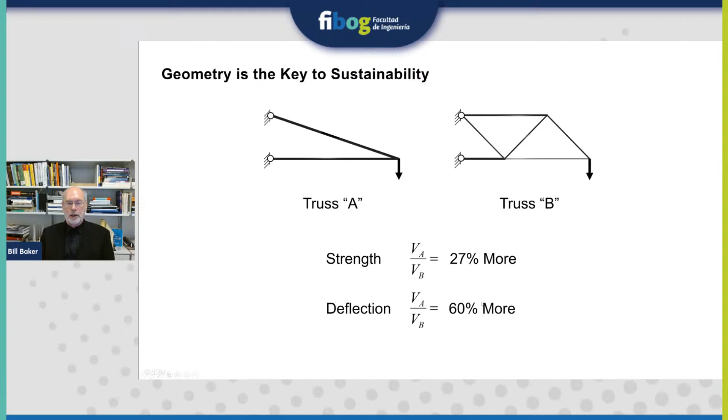Here I show two different trusses that do exactly the same job. There are 3-to-1 cantilevers, truss A and truss B. But if you're controlled by strength, the one on the left needs 27% more material than the one on the right. And if you're controlled by deflection, the one on the left needs 60% more material than the one on the right. The difference between the two trusses is fundamentally geometry.

The efficiency of structures is very important, particularly in these days of concern about the climate, because on day one, most of the carbon of a new building is in the structure.

Geometry is also the intersection of architecture and structure. It is the common language to both disciplines. And we'd like to introduce a little terminology that's helpful in this discussion: topology, shape, and size.

We'll start with the geometry terminology for design. We have what we call the design domain, where the structure might exist. There are three geometrical aspects of this: topology, which is what is connected to what; shape, which is how you take that topology and move the nodes around, if you will, to create an efficient shape; and then finally, how do you size the members?

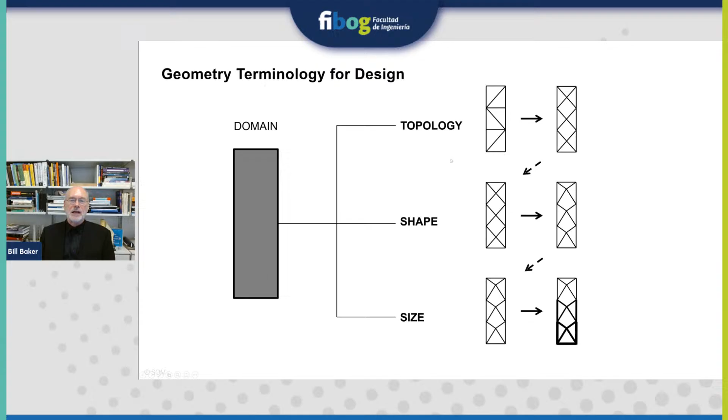Now, topology and shape are very highly related to architecture and the form of the building, but these are extremely important in the design of efficient structures. So it's important that the structural engineer is involved in determining the topology and the shape of the structure.

So how can one create efficient structural systems? I think you have to look to theory for design ideas. So today I'm going to present a few of my favorite theories, if you like, that are very helpful.

I'm going to start with something called the Maxwell load path theorem, created by Maxwell in 1870. James Clerk Maxwell, I'm going to refer to many times today. He is, of course, very famous for his work in electromagnetic theory, but he also did some very important work in our world of structural engineering.

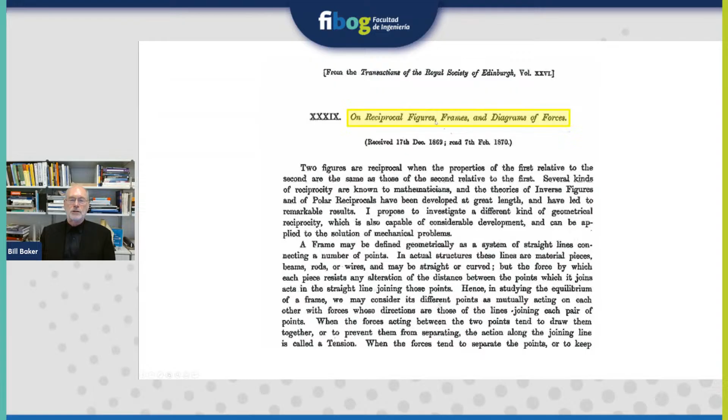He wrote this paper in 1870, called 'On Reciprocal Figures, Frames, and Diagrams of Forces,' where he describes some very important ideas, including this particular theory.

So I'm going to start out with a proof of the Maxwell load path theorem for an externally loaded truss. Here I have a truss. It's in equilibrium.

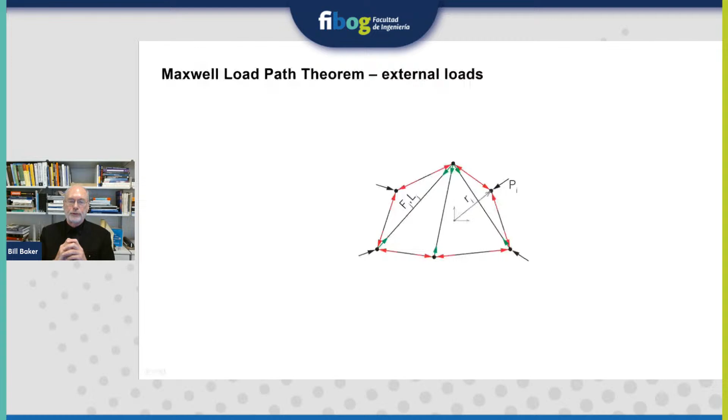I have a series of external loads, and a series of internal forces. The red arrows represent compression forces, the green arrows tensile forces. I'm going to keep the forces but throw away the members. It's important to recognize that every node is in equilibrium—all the forces add to zero at each node.

Now I'm going to take these forces and dilate the space. I'll pick an arbitrary origin, say right here—it could be anywhere. Then I'm going to dilate the space, making all the vectors twice as far from this origin.

As I do that, I do a series of work. First, these dimensions have just gotten twice as long—all the lengths are twice as long. All the external forces are now twice as far from the origin as they used to be.

So we've done a series of works. The external forces have done external work. The compressive members have grown by twice the length, so force times length is the work done. The tensile members are also twice as long, but they've done negative work because their arrows are opposite the direction of the elongation, creating negative work.

But because every node was in equilibrium, all of these forces have to add to zero. In essence, we've done no net work because all the nodes are in equilibrium.

So we can take this and rearrange it. This is the Maxwell load path theorem, where the force in all the tension members times their length, minus the force in all the compression members times their length, is equal to the dot product of the external forces with a position vector from any arbitrary origin.

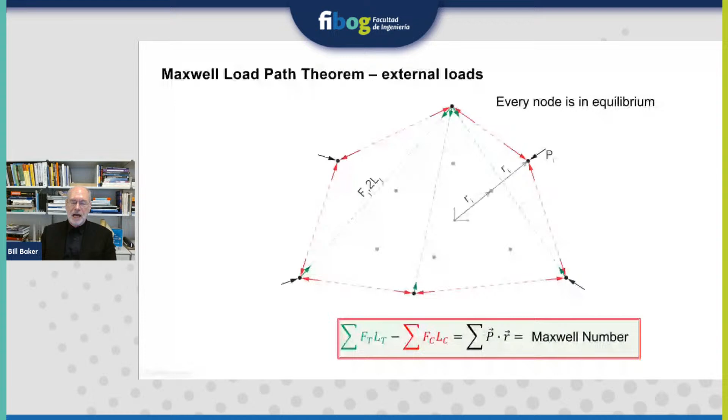For many structures you'll deal with in your career, this is a constant. So in many cases, the tension load path minus the compression load path is a constant. We call this dot product on the right the Maxwell number.

Let me give you an example related to that picture I showed you earlier. We're going to do a Maxwell load path theorem cantilever example. Here I have a cantilever, a load out here, and some supports back here. It's a 3-to-1 cantilever.

The moments are taken out by this couple, this 3P and this 3P, and the vertical loads are handled here. I'm going to apply the Maxwell load path theorem to this. I'll put the origin right here because I can put it anywhere—this happens to be a convenient place.

Now I'm going to do a dot product from this origin to all the perimeter loads. The dot product to this load is 0 because these are orthogonal to each other. Here at the origin, the length is 0, so this dot product is 0. I'll do a dot product to this horizontal reaction—because they're orthogonal, this dot product is also 0.

Finally, I do a dot product to this load at the top, and I get a value of PB. So the sum of all my dot products for all my external forces equals PB. Take a moment to reflect: I haven't even proposed a structure yet, but I already know the difference between my tension load path and compression load path, without even knowing what the structure is.

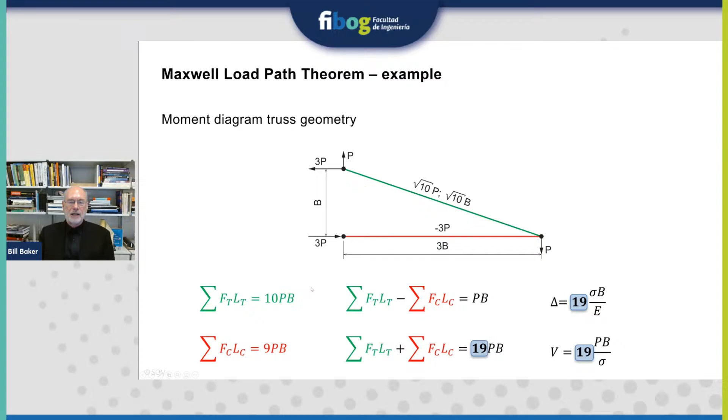So let's try a Pratt truss. If you go through the math, you'll see my compression load path has gone from 9 down to 8. I have 1 PB plus 2 PB plus 3, that gives me 6, plus these verticals, 7, 8. And my tension load path turns out to be 9. My difference has not changed. A completely different structure, but my tension load path minus compression load path has not changed.

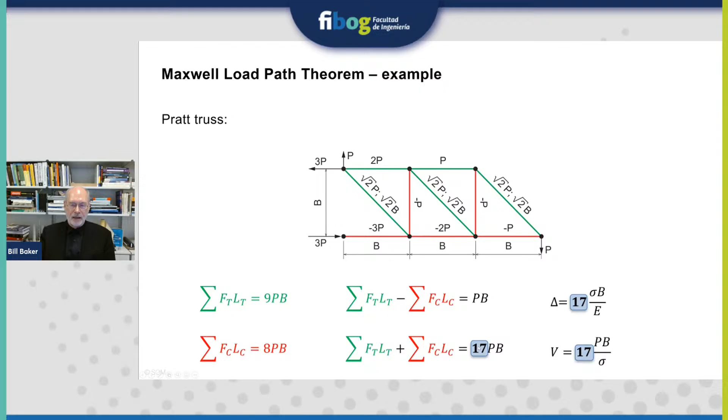My total load path has gone down. I actually have smaller deflection and less material. Let's try another solution - the Warren truss.

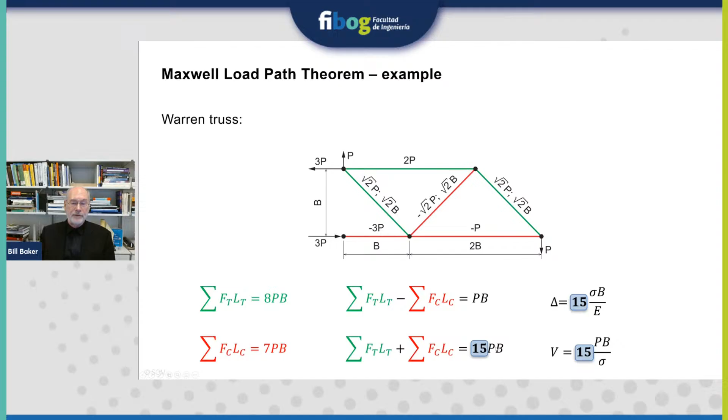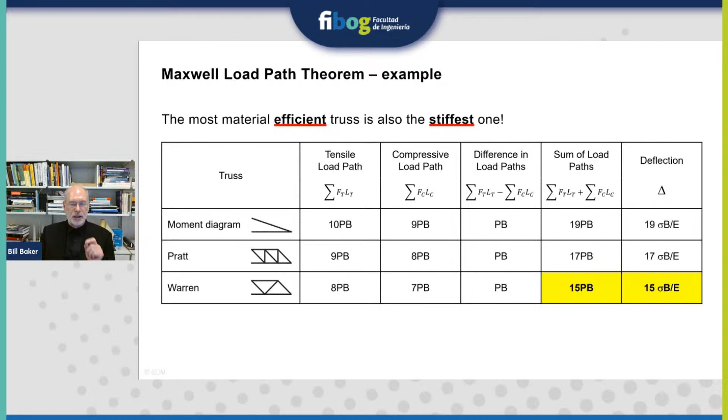My deflection is even less, and my volume is less. The remarkable thing is the structure with the least material has the least deflection, because we're changing the geometry. Now a reasonable question is, how low can we go? Can we find a benchmark for our design? What's the lowest we can go?

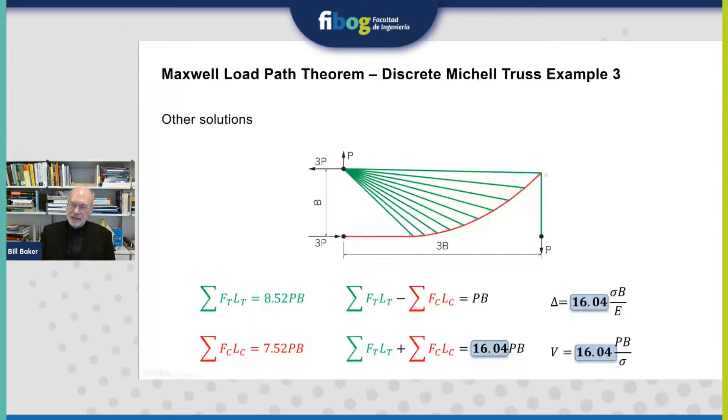I can also come up with different structures which are interesting. Let's say I only want one compression member. This is a discrete Michell truss that only has one compression member. It turns out that all of these angles from the tension members to the compression members are identical. This comes from theory - it's not something I created, it comes from the Michell theory. Now this is a 16. It's not as efficient because I've constrained the problem, but I think it's a very elegant geometry.

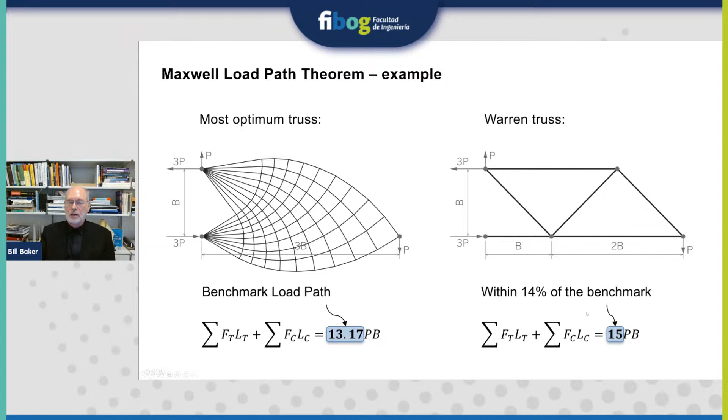So let's compare our lowest value, which is a pretty odd-looking structure, with a more conventional, more easily built Warren truss, and I can see how close I am. I'm within 14% of the lowest possible value.

Now this coefficient is very important. Here I can compare this moment diagram truss with the Warren truss. My deflection is 19 times stress B over E, and this has 15 times the stress in this structure. So I'm going to take this deflection.

I'm going to calculate for a given deflection, I get a stress, I put that here. My volume from the earlier slide is this much. So if I express my volume in terms of my deflection, I get 19 squared PB squared over my deflection times E. If I do the same for the Warren truss, I get this coefficient of 15 squared. So if the deflection of these two trusses is identical, if delta 1 equals delta 2, my volume for the one on the left has to be 60% more - hugely inefficient compared to the Warren truss.

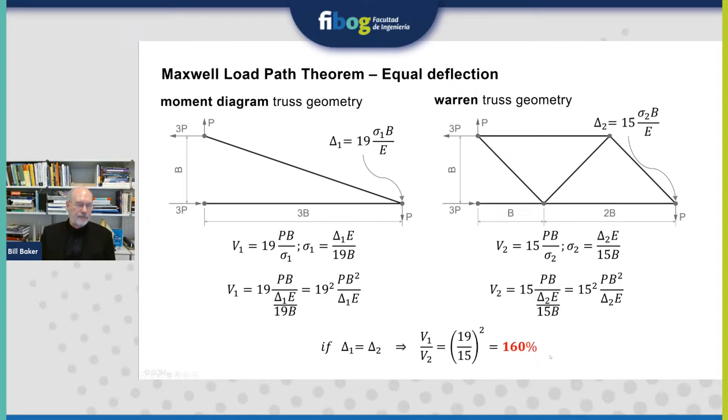This is very important for the design of a structure like this. If you want to optimize this particular structure - this is an Exchange House in London, a building that's also a bridge - you can optimize it by just minimizing the tension load path only.

You never have to calculate the forces in the arch to determine the minimum or most efficient height of truss. You just have to minimize your tension load path. You can even use this approach to estimate the entire structure by only calculating the Maxwell number, which is the weight of the building times half the height, and the tension members, and you can come up with an estimate of the total structural material for the entire structure without ever calculating any of the compression numbers.

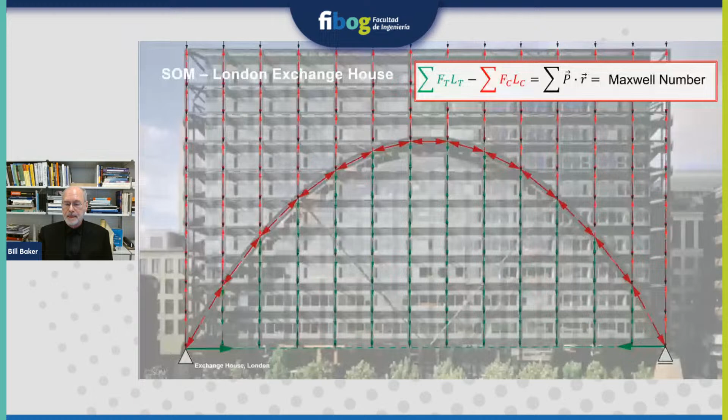Let me go to another theory that Maxwell did, which is we're going to get into the geometry of 2D equilibrium using a process called graphic statics. It's also often called the Cremona method. This was developed by Maxwell in 1864 in a paper with almost the same name as the one I showed you earlier, slightly different. This one is called Reciprocal Figures and Diagrams of Forces.

And he talks about this paragraph, which is hard for us to understand in the 21st century, but it would have been well known in the 19th century, which is: reciprocal figures are such that the properties of the first relative to the second are the same as the second relative to the first.

So here we have two diagrams. One on the left we're going to call the form diagram - it's obviously a truss. And the one on the right we'll call a force diagram, which is a graphical representation of the forces. Every bar over here has a label - this is between different polygons, and between two of the external forces is considered an open polygon. So this member has the name B3.

If I want to know the force in member B3, I go over here and I look at the length from little b to 3, the force in member B3. I go from B down to node 3. So the length of this line is a measure of the force in this member.

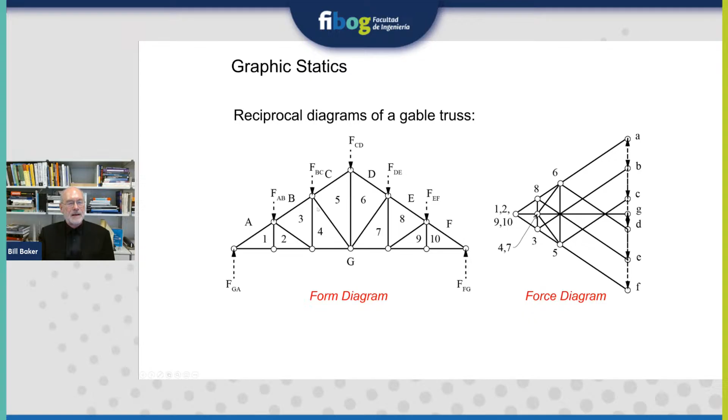And how was this done? It was done very simply. You would go around your structure first on the outside, and you take all your external loads and you line them up - so this is the load from A to B and then B to C. You line them up here: A to B, B to C, C to D, D to E, E to F. Then you get your reactions from F to G, takes you up to here, and your other reaction from G to A, back to where you started. And these are your external loads.

And then just using straight lines, you would pull these lines over and you would automatically, graphically calculate your forces. The length of these two lines are the forces in these two members. This line is parallel to this line, and this force is parallel to this line. So you just keep going. Through this very, very simple graphical method, you can calculate all the forces in all the bars.

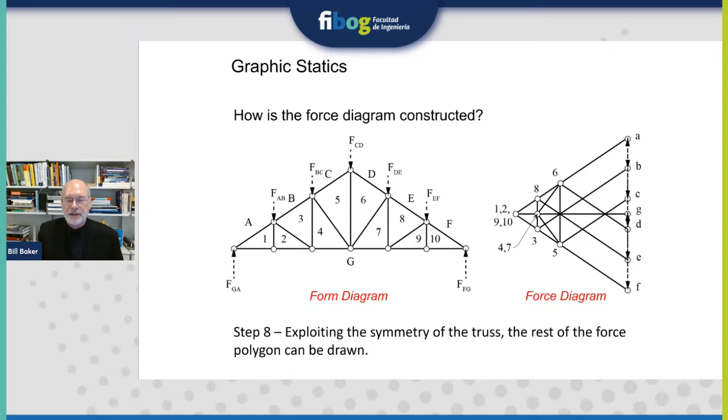And this is how our predecessors used to calculate structures. In the end, you'd have these two diagrams - one represents the geometry of the structure, the other the geometry of the forces. We have other tools for doing analysis today, but I find graphic statics very, very powerful for design.

So, graphic statics as a design tool - instead of designing the structure, let's design the forces. What if we don't like these forces? What if we want this rafter, this chord here on the top, to use one member for all of this? So we want the forces in each of these to be identical. How could you do that? Well, draw the forces - here I've drawn the forces where they're all exactly the same.

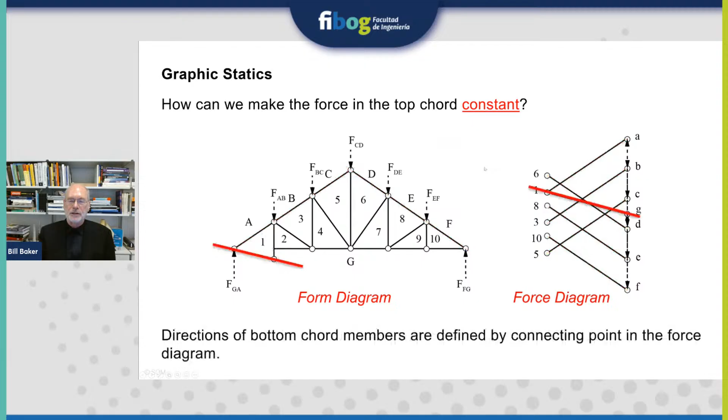And now I have to use graphic statics to figure out the rest of the geometry, by using the rules of graphic statics. In the end, I've now had this structure where it's totally in equilibrium. The forces in my top chord are all equal.

And what's interesting, you'll see each of these nodes maps to each of these polygons, maps to a node over here. Let's look at 3 and 4 - it turns out, let's look at 2 to 3, okay? You'll notice that 2 to 3 are at a point, so there's a line there but it has no length. Therefore, this member has 0 force.

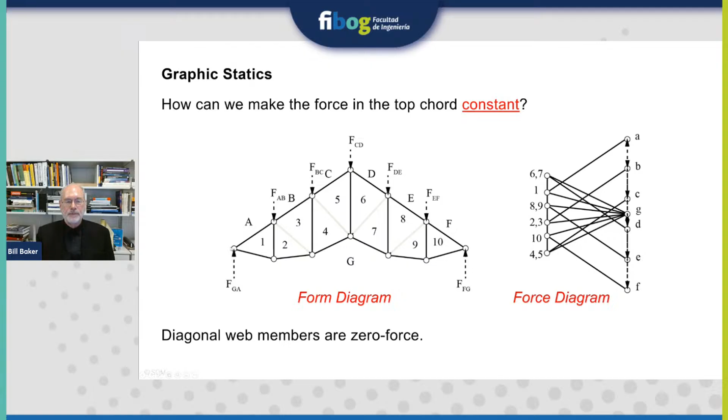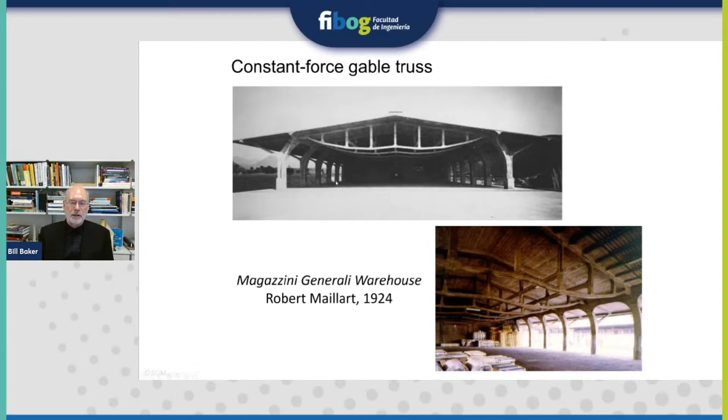And so there you have a funicular shape. It looks a little odd, but one of the greatest engineers of all time used that to design a warehouse over 100 years ago in Italy. Robert Maillart did this, and he designed some of the most beautiful structures in the world, and he did them all with graphic statics.

You can do other things. Let's say you want a truss where the force in all the top chord members and all the bottom chord members are identical. You can easily do that with graphic statics just by drawing the forces, and then you figure out how it comes together.

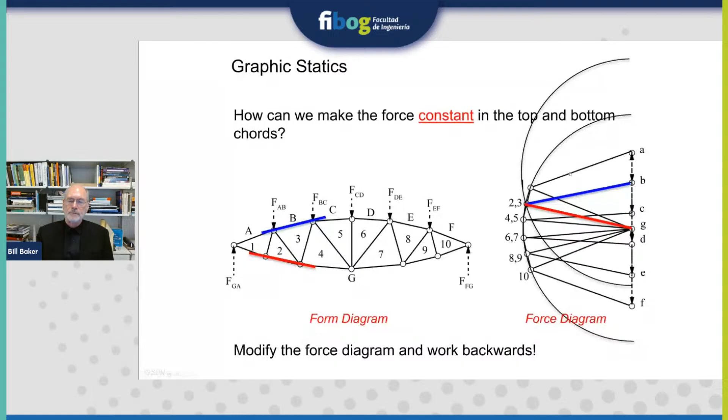Now Maxwell did something else, which is an extension of graphic statics. So once again, we're going to go back to his paper from 1864. He had this concept: the condition of the possibility of a reciprocity in plane figures are the same as those of each figure being the perspective projection of a plane-sided polyhedron.

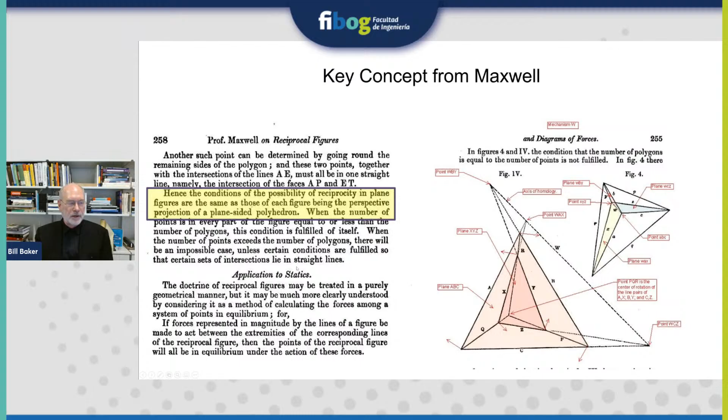What does that mean? Well, here we have a truss. It's in equilibrium. The black lines are the force members, the red lines are the external forces. From graphic statics, we know the force in all the members. Let's say I wanted the force in member C4 - well, it's the length from C to 4. That's the force in this member. It's all there. Well, I'm going to use a little technique given to us by Rankine.

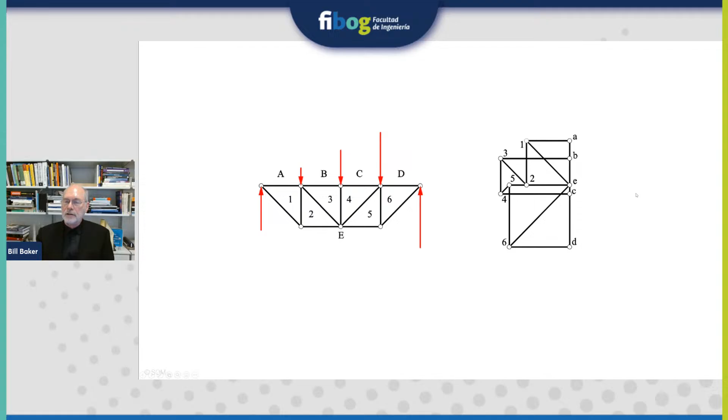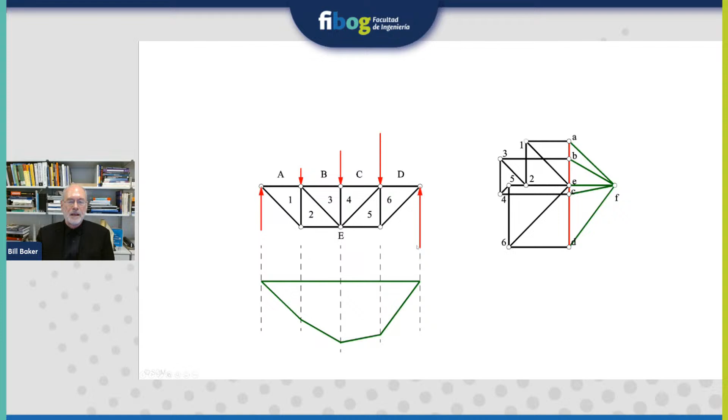I'm going to put a little dot over here, and that dot is going to go to all these loads on the external forces. What I've created is essentially a funicular structure, where if I took these red forces and put them on as a string, it would all be in equilibrium. So now I'm going to take this up there, and now my truss - these new members all have forces. If I know the force in one of these red members, I know the force in all of them, and it's loading this black truss. So the forces in the black truss have not changed at all, but I've made what I'm calling a self-stress structure - a structure that pushes on itself.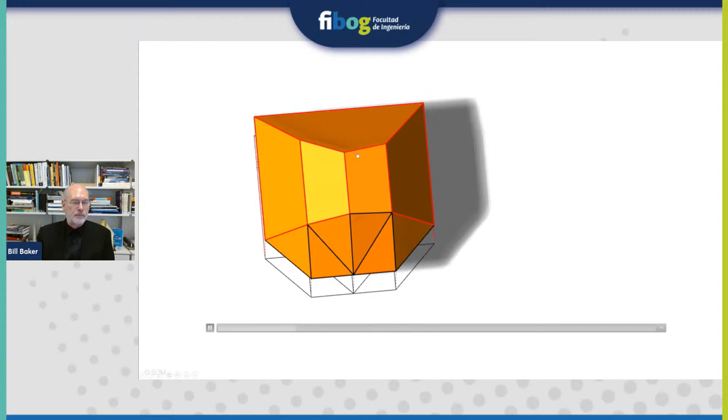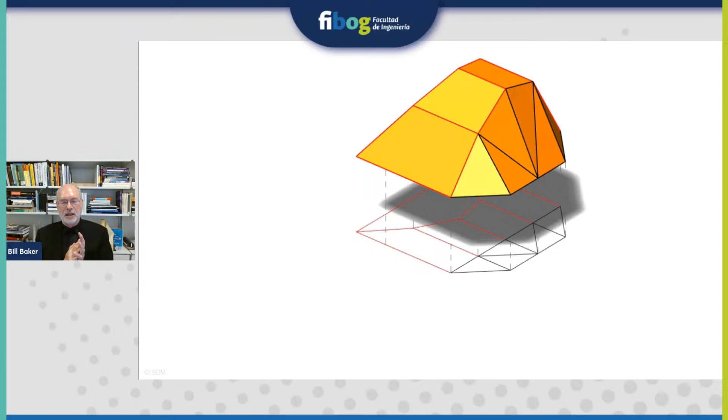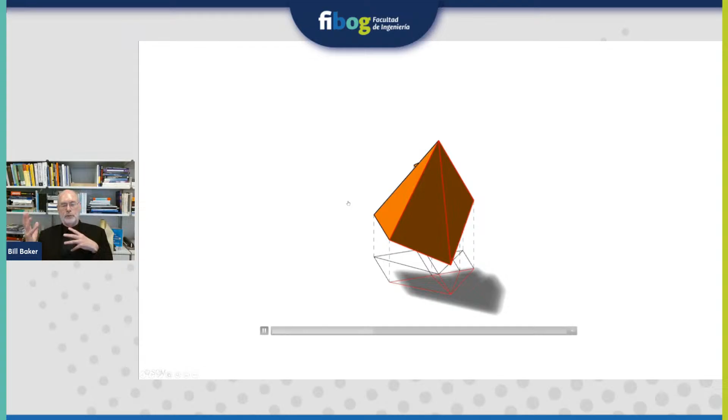And what Maxwell observed is because that's in equilibrium, it's a projection of a polyhedron where every face is exactly flat. Furthermore, the force in each of the bars is proportional to the change in slope between all the faces. Totally remarkable - that equilibrium in 2 dimensions is related to a plane face polyhedron in the 3rd dimension. Here I've separated the forces in the truss from the forces in the loading system, but the change in slope is proportional to the force. All the ridges are compression members, all the valleys are tension members. And it turns out that this polyhedron has a reciprocal polyhedron, which maps to the forces. So it's incredibly rich 2-dimensional, 3-dimensional geometry between form and forces.

What is that polyhedron? Well, it turns out that polyhedron relates to another theory, the Airy stress function. George Biddell Airy created the stress function. He was curious - in fact he said this in his paper - he was fascinated by Robert Stephenson's Britannia Bridge, this early box girder, and trying to figure out the forces in those boxes.

And so the Airy stress function - you take equilibrium on an infinitesimal piece of material with some body forces. From mechanics, we all know how to do this. Here's your equilibrium in the x direction, your equilibrium in the y direction. In this case, we're going to throw away the body forces.

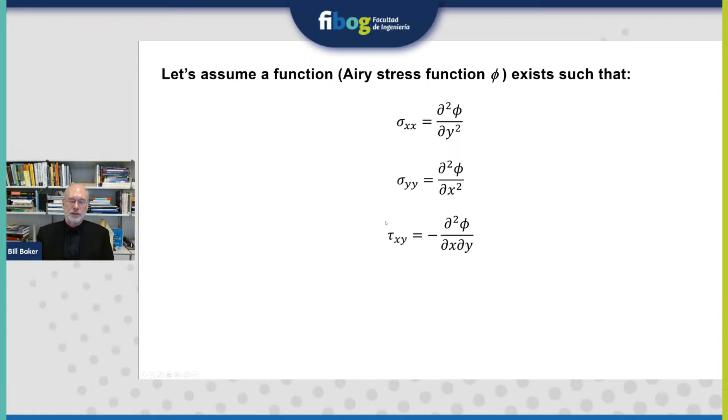And now we're going to assume that there exists a function - we'll call this the Airy stress function, phi - where the second derivative of phi in the y direction is stresses in the x direction. Just accept this as an assumption you're going to make: the second derivative in the x direction are the stresses in the y direction, and the negative of the cross derivative is the shear stresses. If you make those assumptions and use your equations of equilibrium, you will find that you will always satisfy equilibrium with the Airy stress function.

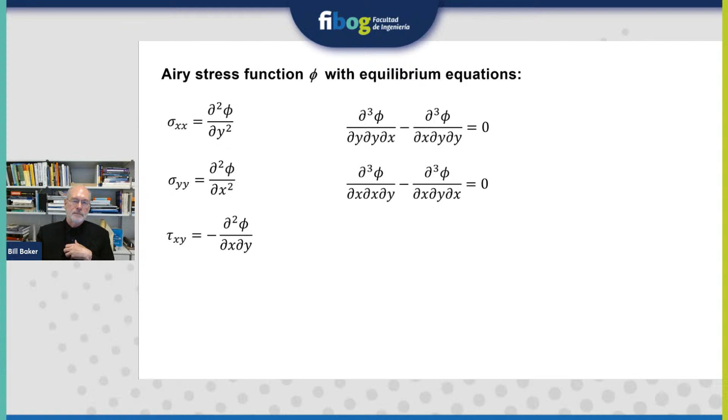Always, okay? Now, the trick is you've got to come up with an Airy stress function that matches the boundary conditions. Not always so easy, but let's say your Airy stress function is a series of slopes, like that truss I just showed you.

Well, it turns out that the change in slopes from one face to the other is proportional to the forces. And just as I told you, all the ridges turn out to be compression forces, all the valleys are tensile forces, and because I'm going from a flat surface to a flat surface, I am in equilibrium. These forces exactly add to zero.

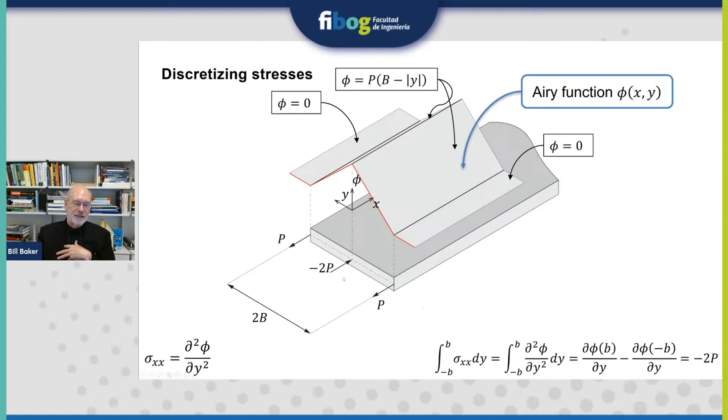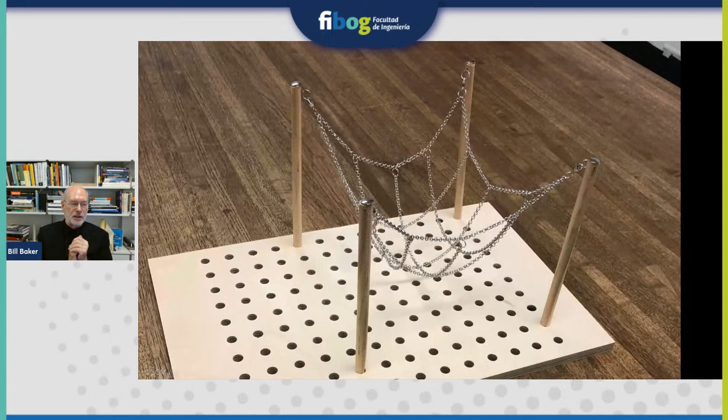Now, how can we use this? Well, let's use that to design some grid shells, all right? But now I want to point out some very important things. Three-dimensional structures are very difficult, right? But for a three-dimensional structure to be in equilibrium, the two-dimensional projection has to be.

Now, here's a model I made in my office. Clearly, it's loaded by gravity. It's a chain model, it looks all curvy. But if I look straight down on it, I'm looking at a two-dimensional projection of three-dimensional equilibrium, and I no longer see gravity. Think for a minute. I'm looking parallel to gravity, so I no longer see gravity.

All I see are the horizontal forces and the reactions at these posts. And as I just told you, because this is a two-dimensional structure in equilibrium, I'm also looking down at an Airy stress function, a polyhedra that has exactly flat faces.

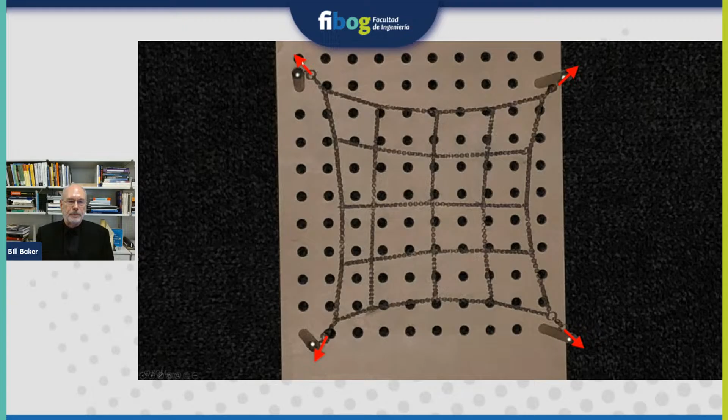But I could take this two-dimensional structure, I can replace these red reactions with a reaction frame, and now I have a self-stress structure that is in equilibrium. It's in two-dimensional equilibrium, but we know it can also be the projection of a structure that is in three dimensions. And so what I find very easy in design is to do my designs in two dimensions using equilibrium and then projecting to the third dimension.

And to do this, I'm going to go to the theory. I'm going to go into Timoshenko's book, and we're going to look at a theory by Pucher. So we're going to go to Timoshenko's book on the theory of plates and shells. And if you go in there, he presents a theory by Pucher.

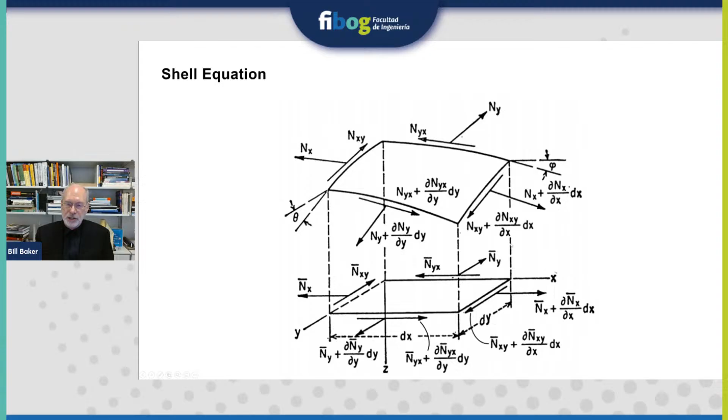And this is on the membrane of a shell, but it's a shell where all the forces are up here in the membrane. But we're going to project, just as I was saying, we're going to take this load that's in three dimensions, and we're going to do all our mathematics about the XY projection of this. So all of these forces that are in the membrane, we're going to project down into the horizontal plane, and then we're going to calculate our equilibrium.

And after a bunch of basically just algebra, it's really quite straightforward, you'll end up with this equation where to design this grid shell, you have the Airy stress function and the geometry of the roof. Those are the only two things you have. You've got this,

and you'll see that the Airy stress function, the second derivative in the y direction, times the shape of the roof, which is the second derivative of the roof, the z coordinates, in the x direction. So they're orthogonal to each other. And you'll see that the Airy stress function and the roof are equally important.

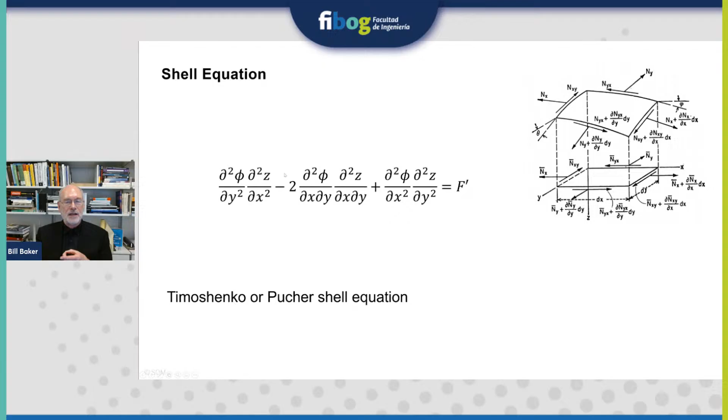And in this equation, this F is the uniform downward load on this membrane. Now, this is calculated about the projected area, but this is the vertical load, and this will give you equilibrium for a membrane structure. And it's very, very important to note that you actually have two geometries now. You have the Airy stress function and the roof, and both of them will satisfy equilibrium.

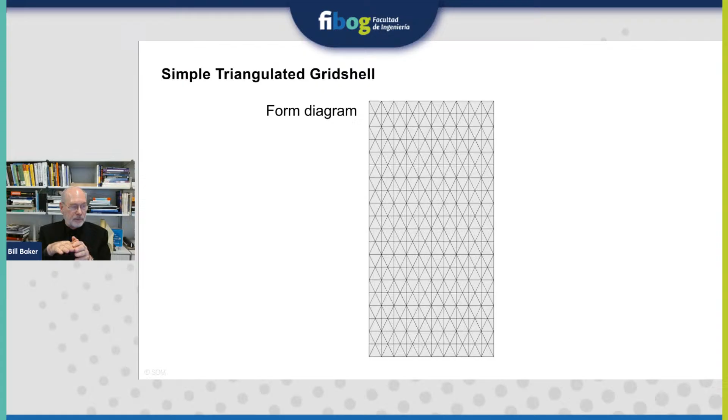So let's design a grid shell using the Airy stress function. So here is the plan dimension. I've done a triangulated grid, and this is important so it can develop horizontal thrust. If I'm designing a three-dimensional structure that has force, I have to have a two-dimensional structure that can thrust. Okay, this can clearly thrust. And so notice I've triangulated and it can thrust into the corners.

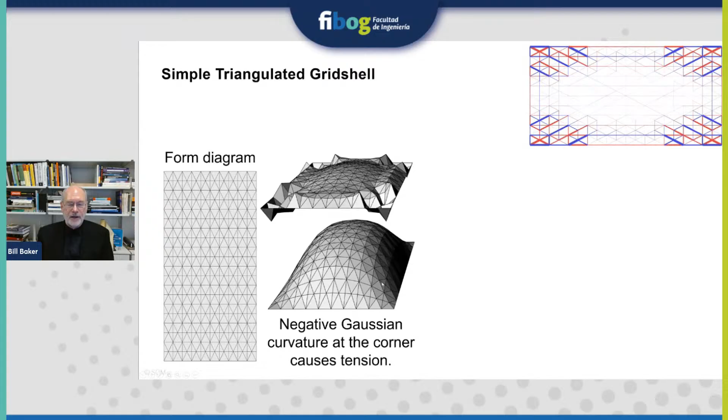Okay, so let's try something else. Let's modify this shape a little bit. Maybe a little bit better, but not a lot better. Once again, either one of these could be the roof, and the other is the Airy stress function. But you can clearly see because I had some really big changes in slopes, I got some really big forces in some of these members. You can see that here in this diagram. So what am I going to do?

Well, let's go to electromagnetic theory. Let's use the Biot-Savart law, and we'll put an electrical current in this wire forming a polyhedron, and we'll look at the magnetic field using the Biot-Savart law, and we'll use that to create the shape. Oh, now things are looking pretty good.

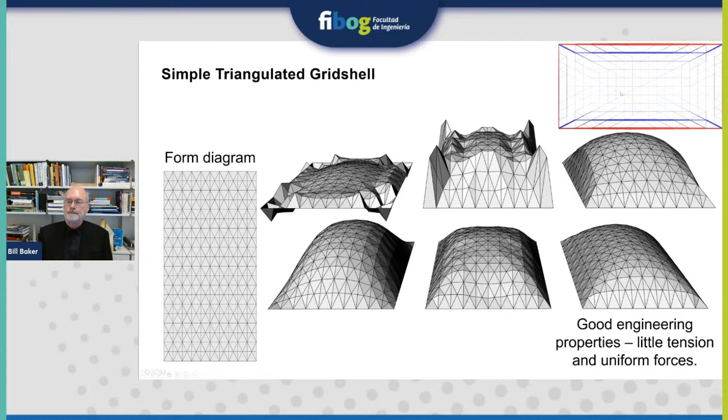And remember, either one, the roof or the Airy stress function, can be swapped. You actually have created two solutions to your problem.

Okay, now I'm going to go to one of my other favorite theorems. This is virtual work. Once again, we have to go back to Maxwell. This is another paper, a different paper from 1864, called On the Calculation of Equilibrium and Stiffness of Frames. So I'm going to do it using a little bit different technique than Maxwell did.

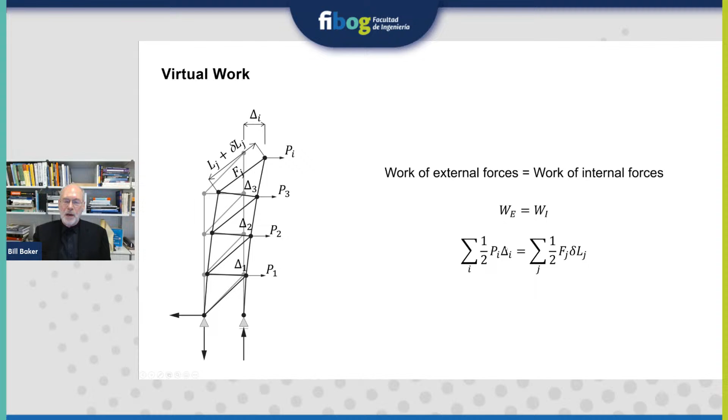So I'm doing my external work. That's because I brought the load on slowly. Now my external work is 1/2 times my final forces times the change, the displacements, at all the nodes. Now this is the displacement in the direction of the load, because this is the external work done. And that is equal to the internal work, due to conservation of energy. So that equals the force in all the members times the change in length of all the members times the half, and you add all these up and they have to be equal.

Now let me do a little bit of a different problem. Let's say I have a structure and it's already existing there. It has a load on it up here, capital P, and all the bars have a load in it, and it's in equilibrium.

Now I'm going to take this structure that already has this load in it, and I'm going to add loads like I did in the previous slides. I'm going to add these loads, and I'm going to put them on slowly. And in the process, as I put these loads on P1, 2, 3, and 4, I'm going to get deflections at each of these nodes where the loads are applied. I'm going to get forces in all the members due to these new loads. I'm going to get an elongation or shrinkage of all these members due to these new loads. And this node here, the one that this load V is on, is going to move. And I'm going to call that delta star.

Okay, so we put all these together, and now we have one structure. Now let's calculate our external work and our internal work.

Our external work: this load that was already on there has moved over by delta star, so it's the work of V times delta star. There is no 1/2 here. But these loads that came in the second load case will have the 1/2, just like we had on the previous slide, force times displacement times 1/2.

Now this external work has to equal the internal work. Well, what is the internal work? It's the force in these bars that was already there times the change in length of the bars. Add those up - no 1/2 on this one - and then the elongation due to the new forces and the loads.

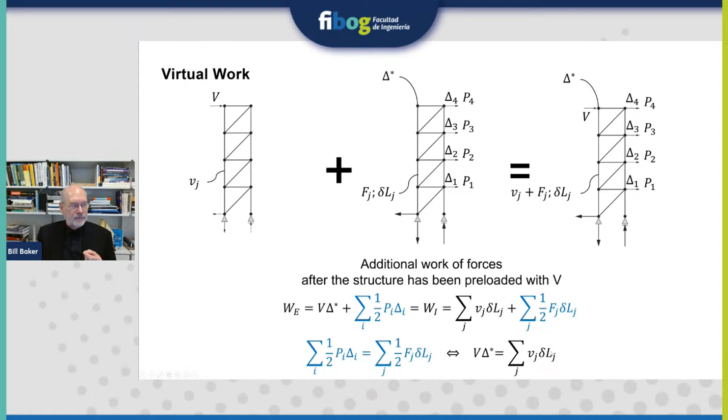Think about that for a minute. This is totally bizarre, totally bizarre. You've got forces from one load case times the displacements from a second load case. But this is brilliant because it tells you amazing things.

So what if a critical design criteria is how much does this structure move in this direction at that point? This has amazing properties.

Now I'm going to divide both sides so that my virtual external work is equal to my virtual internal work. I'm going to divide both sides by V - so now this is called a unit load, little v's by capital P. My displacement is equal to the summation of the unit loads from my force and all my members from the unit load case times the change in length from the second load case.

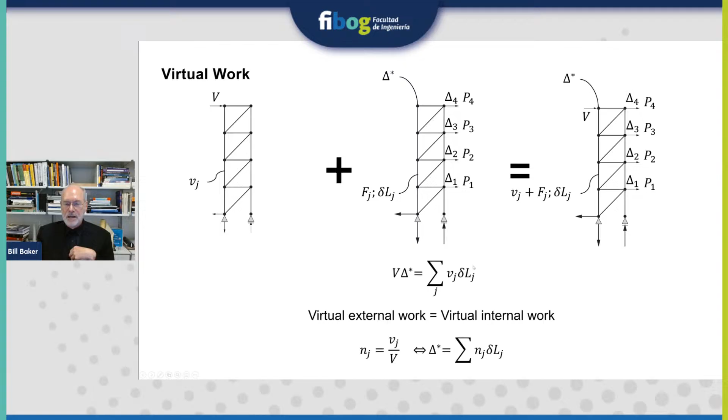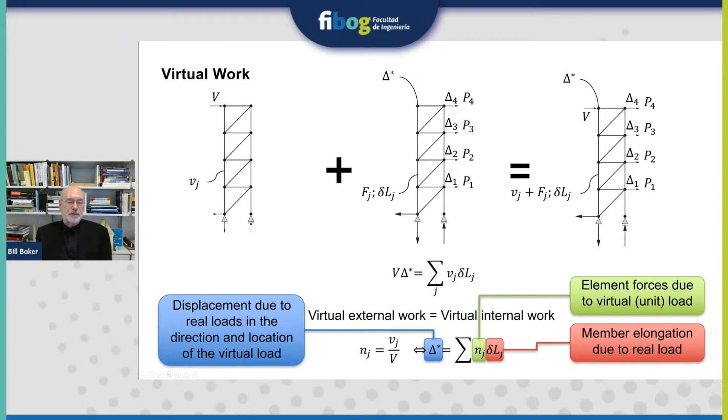Here I have change in length. Now this change in length - let's save - so I got my element forces due to the virtual unit load and the elongations due to the real loads. It's the displacements due to the real loads in the direction and the location of the virtual load.

Now that change in length is strain times the bar length, which is stress over modulus times the length, which is, as we're used to saying, force times length over EA. The stiffness of this bar is EA over L. So the change in length is this F over K.

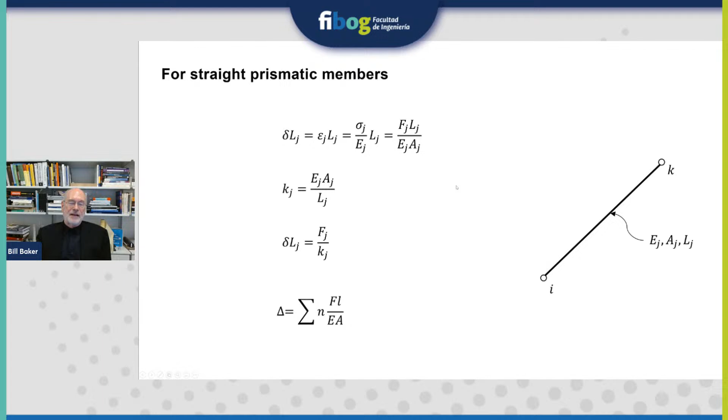So this is how I normally write it: my virtual work, the change in length equals the summation of the unit loads times the force in the bars times the length divided by EA. Now, the bars don't actually have to be straight - they can be curved. You just have to have a linear relationship between the force and the displacements.

This is incredibly useful in design, one of my favorite tools. It's great for solving geometries. So this tells you how I put a unit load here - I'm concerned about the top, how much my building moves to the top.

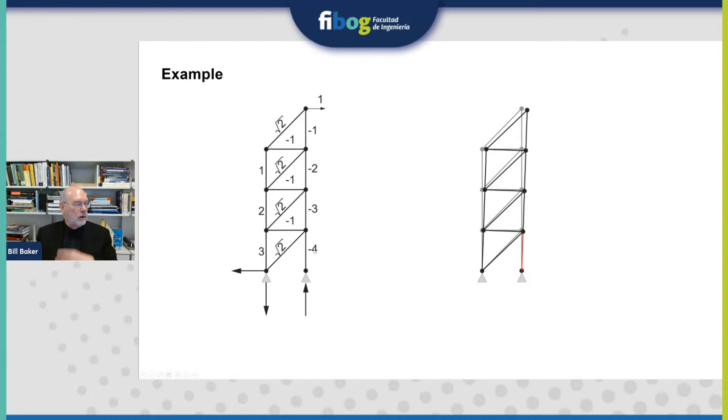This tells me how important every member is. This guy is only important of 1. This guy has an importance of 4. What does that mean?

What if, for instance, this bar here was shipped to you the wrong length? Let's say it's precast concrete, and they ship it to you - they made a mistake in the factory, and it's short by a dimension delta. You want to know what is that going to do to my structure?

You could do a really complicated geometry thing. No, you use virtual work. I know that this will move 4 delta from virtual work. Very, very important - so virtual work is a geometry solver.

You can also use it for optimization. I'm going to use the theory of Lagrange multiplier.

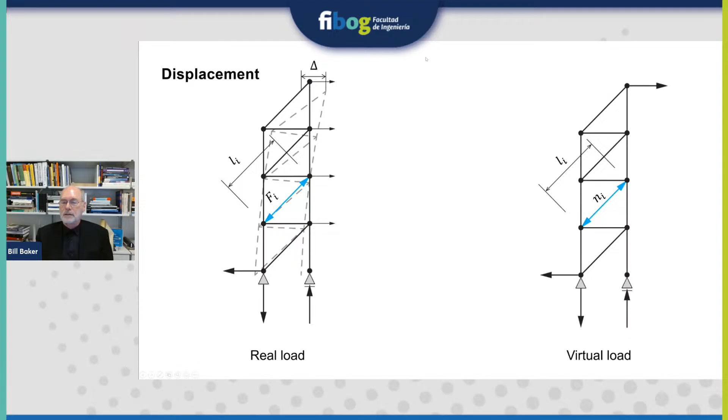So here I have a structure. It's got real loads on it. I'm going to put a unit load on it, and I'm concerned about how much it moves at the top. So I put a single unit load here at the top, so I can figure out how to move. I'm going to use this thing.

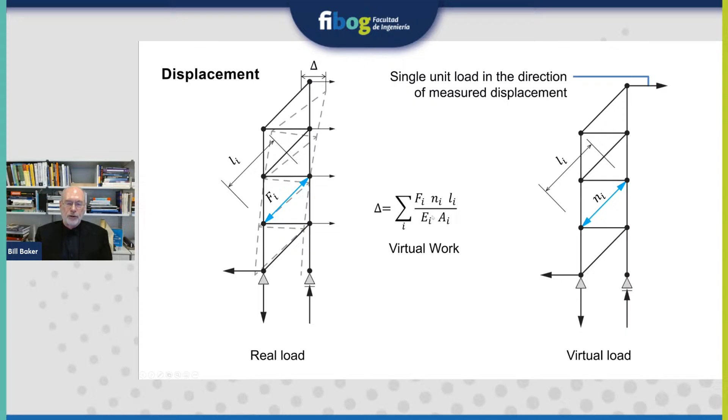This is a very important equation. This tells you how much every single bar, every individual bar, what is its contribution to that deflection at the top. So F, L, E, A. And not only to the deflection at the top, but in a particular direction. The virtual work, okay? Now I'm going to do some optimization using the Lagrange multiplier technique.

So what I'm going to do is I'm going to take this thing and I'm going to add to it essentially 0. I'm going to make it a constrained problem. Here is the area of my bars times the length, which is the volume of each individual bar. I'm going to add them up, and that's going to be equal to my total volume. And so this is essentially 0.

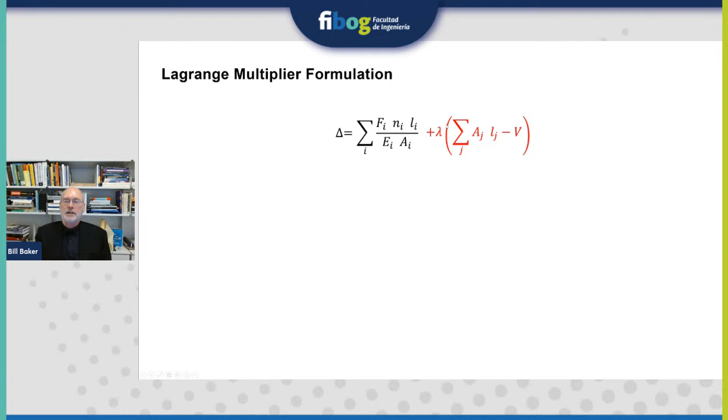I'm going to multiply it times this constant called lambda. And it turns out, if you have certain constraints, that lambda is the same for every member in your structure. It's a constant for the entire structure. And so this is the virtual work.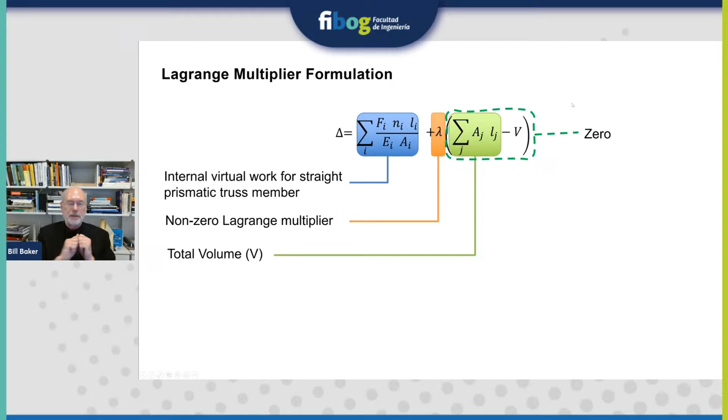Here I'm assuming straight prismatic members. This is a non-zero Lagrange multiplier. This is the volume of each of the members. And so this green thing adds to 0. So I haven't really changed the problem. I just constrained it. So now I want to do a little optimization.

So what I'm going to do, I'm going to do a little calculus. I'm going to take my first derivative. So if I have a statically determinate problem, I can do this. I'm going to take my first derivative of this with respect to my areas. Because my design variables are the cross-sectional areas of each of the bars. I can change each of the bar areas individually.

So those are my design variables. So I'm going to minimize this with respect to area i. I do my first derivatives. And because this is the denominator, I end up with the minus sign and a squared. You know this from calculus. And then I have my rate of change of member j with respect to member i.

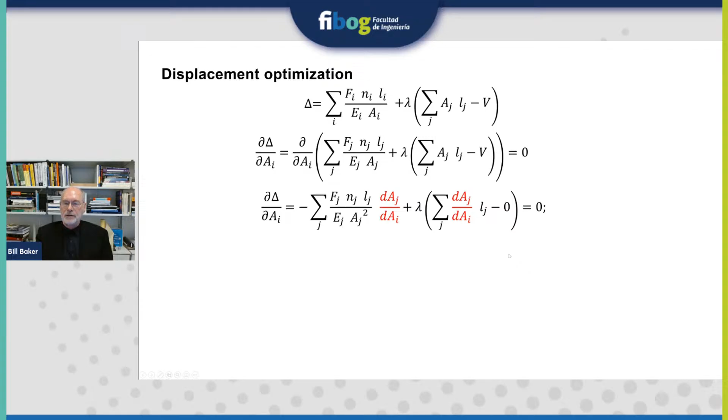And then over here on my volume side, I have the same thing. Now my volume is constant, so this derivative is 0. And here, I take my derivative here, I end up with the same term. And because these are independent variables, I can change any area independent of any other.

So this value is like the Kronecker delta. It's either 0 or 1. And so what that does, it blows apart your summation. So I no longer have to do the summation. I just look at each individual bar. And so I have this calculation.

And it was interesting that my lengths cancel. And so for an optimal structure, my lambda is equal to force in each of the bars times the unit load in each of the bar divided by E divided by the area squared. And this term needs to be the same for every member of the structure, which is essentially saying that the virtual force and the real forces times each other divided by the modulus is a constant.

Now, if you know this information, you can go through some algebra. I'll give you a reference to a paper, so we don't want to go into much detail. But once you know that, you can do some algebra. Now, this will work if the virtual work and constraining function are smooth, and the constraining function has a non-zero gradient, then lambda exists and is unique. And those are the kind of rules.

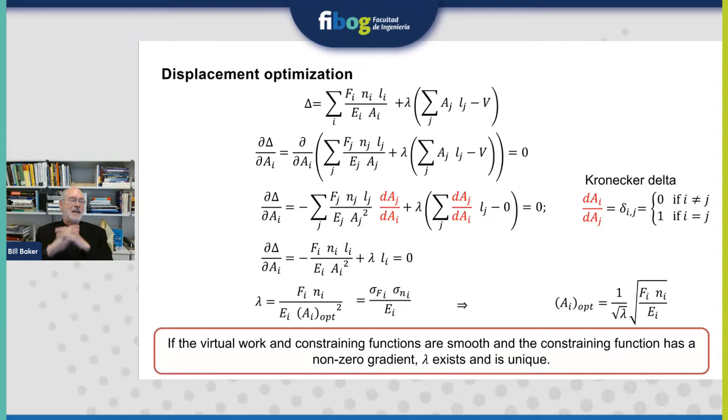And this generally applies to statically determinate structures. I use this all the time, even on indeterminate structures, because it gives me a good idea of what I need to do. Okay, and this is in a paper. I'll give you a reference to in a minute. You get your, so once you do that, you say you have a target deflection you're trying to hit.

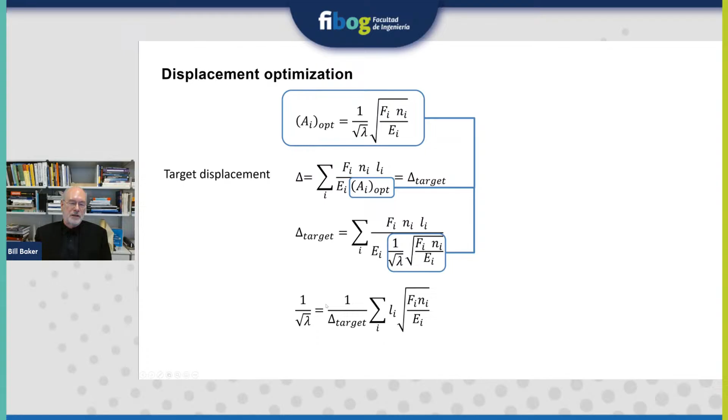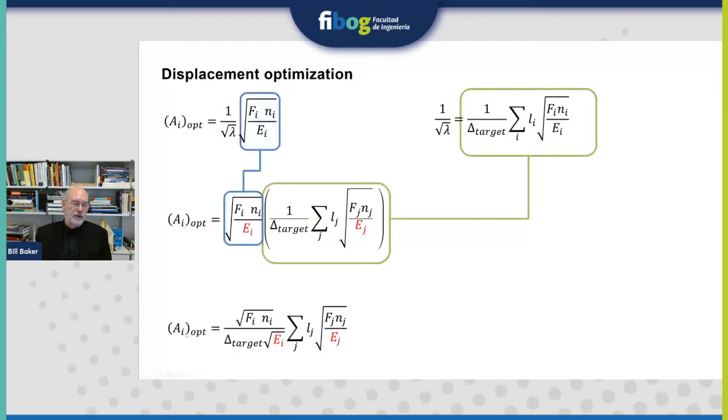So you take that value, and then from there, using your target deflection, you can put in your optimal area. From that, you can now calculate what your lambda is. Once you know your lambda and your optimal area, you can put them together in the same equation and simplify it. Now you can figure out the area of every member of your structure, which will give minimum deflection in that direction at your point.

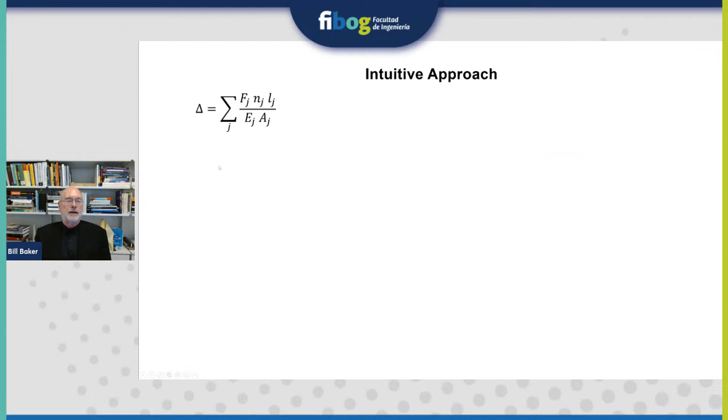A more intuitive approach: here is the Lagrange multiplier. This tells you, very importantly, that each member contributes a calculable amount to the total deflection at the point. But each member also contributes to the volume, so the cost of the structure, and how much embodied carbon is related to this.

So let's take the contribution to work and divide it by the volume. When I figured this out, I was working on a very tall building. Fazlur Khan was still around, I was working on one of Khan's projects, and I said, well, what if I divide the work by the volume? Seemed like a good idea. Guess what? That's what the Lagrange multiplier is. It's the virtual work divided by the volume. So what you end up with is a uniform virtual work density. Lambda is the virtual work density, and it is uniform at the optimal solution.

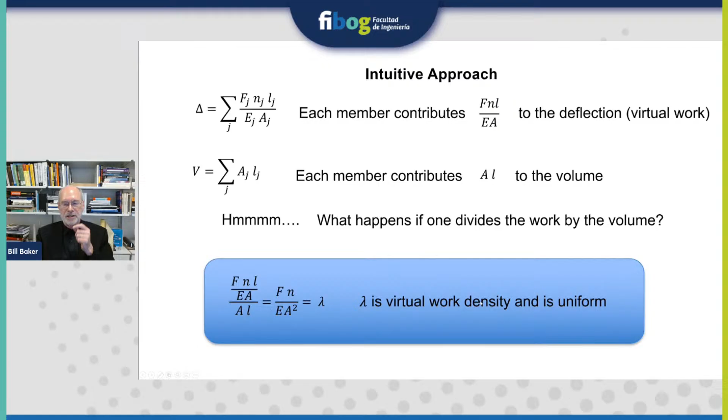If you think of it as thousands of beams and columns, that's too complicated; our minds cannot deal with that. So continue with a simple beam, and a cantilever—it's a cantilever beam, cantilevering out of the ground. And the theory of cantilevers goes back to Galileo.

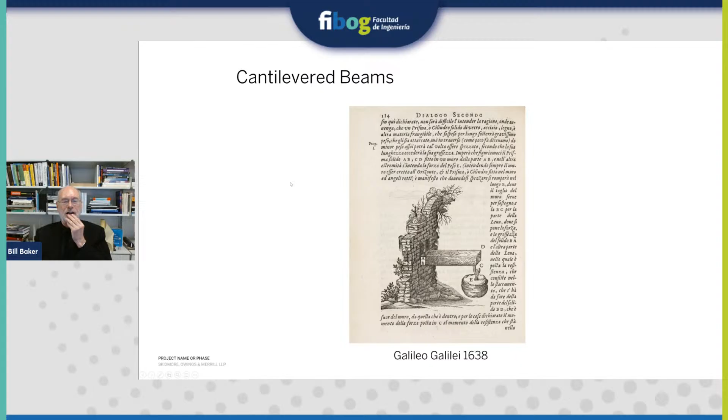As you hopefully know, Galileo was the first modern structural theorist, and he wrote this treatise on the strength of a cantilever. He actually got it wrong, but he had some part of it right. He started the conversation and did come up with some very correct interpretations, even if some of his mathematics weren't quite right. So here he has this cantilever coming out of this ruin of a brick wall with a weight on it.

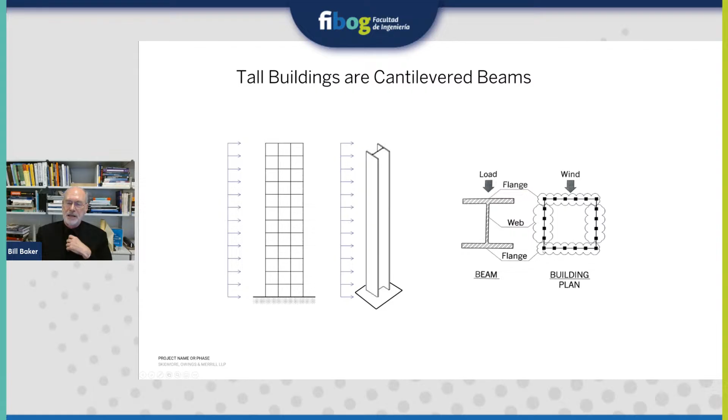Cantilevers like this, but a building is also a cantilever—you put a force on it and it deflects. So a lot of times, you have this tall building, which is a frame, and you can think of it as a beam. For designing a beam, we have flanges that take the moment and webs that take the shear. The web has to be connected to the flanges to make them work, because the overturning moment is the integral to shear. So the shear-resisting stuff and the moment-resisting stuff have to be interconnected. In a building, for many buildings you could assume these columns act like the flange, and these columns and beams act like the web, connected together—that's a pretty reasonable assumption.

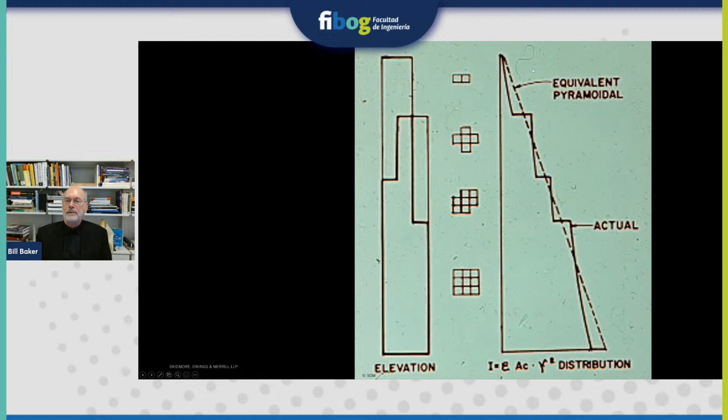Here is a simple calculation of the moment of inertia, I, which is the area of all the bars, the summation of the area times the radius of gyration of the columns from the neutral axis. Furthermore, it's a step function, but they took an equivalent approximation as just a straight line.

Here are the forces at the bottom of the Willis Tower. They call it a bundle tube, but to me it's really more like one giant beam with four webs. Here's a flange, here's a flange, here's kind of an intermediate flange, and another intermediate flange, and it has these four webs that deliver the loads to the flanges. Here's the stress distribution at the bottom of the Willis Tower—as you can see, it's not exactly plane sections remaining plane, but it's pretty close.

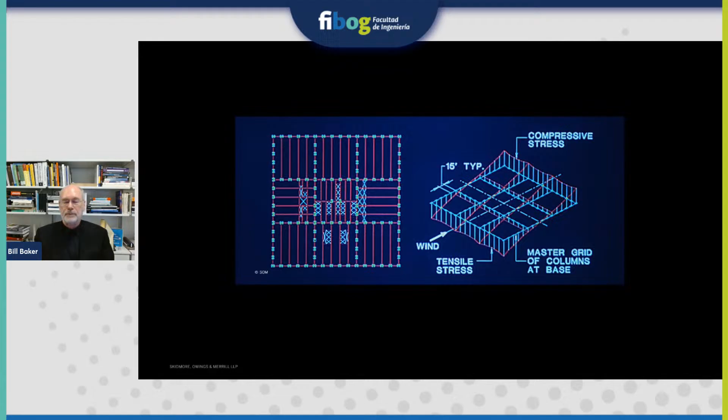That is how we designed the Burj Khalifa. It's a giant beam—it just happens to be an 828 meter tall beam. This particular beam is predominantly concrete. The very top is a spire. It's on a 3.7 meter mat.

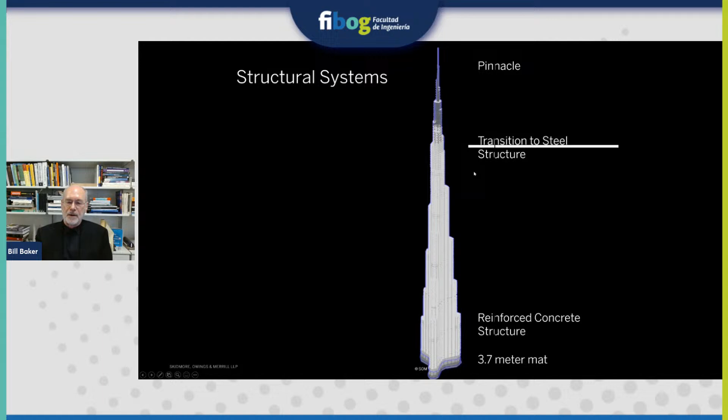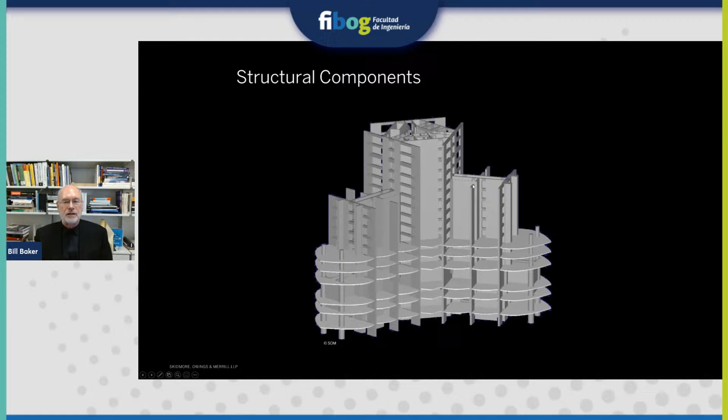Here are the components. It's a bunch of walls that do the combined function of both delivering shear and being the flanges. So this is like a flange, this is like a web. We gave it a name—we called it the buttress core. And if you look down, it's a giant structural shape of a beam.

Now, in a tall building, you're very concerned about twist—you don't want it to torque. So we created this core that goes around the center, elevators and stairs. It's like a tube. It has very high torsional stiffness, so the building doesn't twist. But it's very slender to go 828 meters—too slender. So what we did is we buttressed it.

This is a residential building, and for privacy reasons these wings use 120 degree separation. Down each of the corridors we have these webs going on, and between the apartments we have these walls, which act like flanges. So these legs act like webs and flanges. We also have some structure that reaches out to grab these perimeter columns—we call them nose columns. And that is how it is.

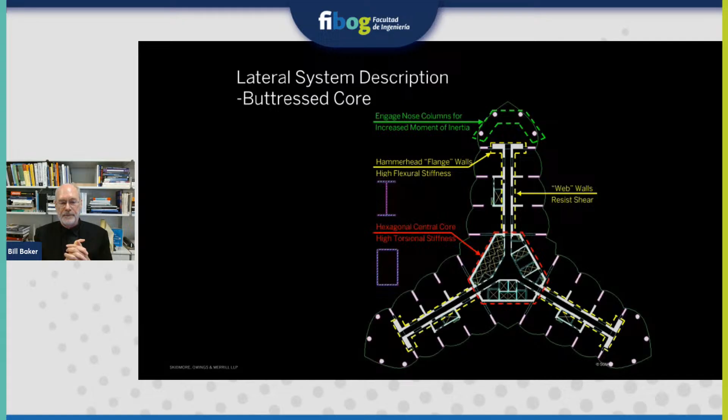When we designed this building, we actually calculated the radius of gyration of the entire building. That's it. And this happens to be a very, very efficient beam with very little shear deformations. It's almost like a pure beam where plane sections pretty much remain plane. And so that was the final idea from this.

As I told you, I'll give you a few references for the stuff on graphic statics and those techniques. I urge you to look at this article. There's also other articles—this is the American Institute of Steel Construction, the Engineering Journal from the third quarter of 2015. It's structural innovations combining classic theories with new technology.

And then for the Lagrange multiplier and optimization, here's a paper I did many years ago called Energy-Based Design of Lateral Systems. I published this back in February 1992, a little while ago. This is in the International Association of Bridge and Structural Engineers, their Structural Engineering International publication.

Okay, and so with that I want to thank you for your attention. And now, I've stayed on schedule—okay, I'm running maybe 4 minutes over, and so with that, I guess we'll take some questions.

Okay, thank you, Mr. Baker. This was a great opportunity, and your lecture was truly remarkable. You took us from graphic statics all the way to the Burj Khalifa. So, thank you. Yeah, it's about 150 years worth of engineering there. Okay, yes, now—